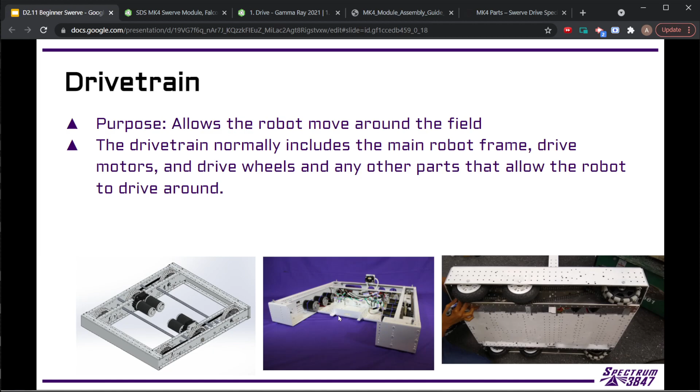These are what kind of the standard drivetrains look like, which we went over a couple weeks ago when we talked about different subsystems. But we did briefly touch on that Swerve exists in that presentation, and it's definitely one of the most advanced drivetrains. It takes more motors, so you need 8 motors because we're independently steering each wheel and driving it. So this allows for a lot more control of the robot. It allows the robot to do maneuvers that a normal tank drive or skid steer robot can't do.

So it allows for the full moving forward, reverse, left, right, spinning all at the same time, which has some big advantages in some of the games where we're able to easily realign, readjust, and change our motion of the robot as we're going a lot easier. But it does take some specific design things where you have the corners of the robot all taken up, and again more complexity with the different motors and things. So trying to figure out how this actually works and how we get to the steering is a lot of what we're going to look at today. But first we're going to look at the history.

So going all the way back to the 2000 games, this is even before I was in FRC. We have this robot here that was built by Team 47, whose name was Chief Delphi. That's where the forum we use gets its name. They had independently driven front wheels, so they could steer these front wheels and power them. But the back wheels were unpowered and just castered, because back then we had a lot of motor limits. You didn't have a lot of motors to be able to do anything. But this allowed them to get the motion they needed for the game. This is one of the first instances of this concept of independently steered wheels coming into FRC.

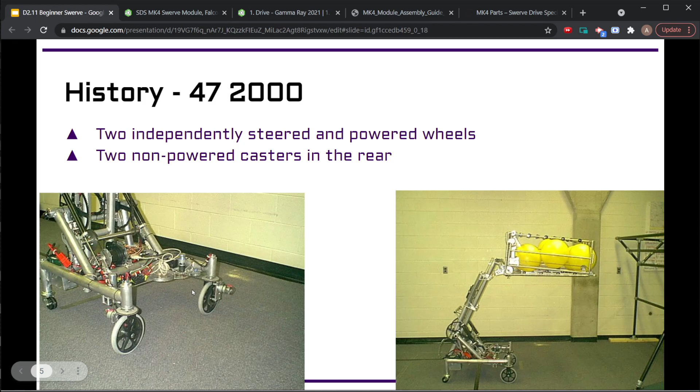From there, several more teams started playing with it and doing different things. The next one we're going to talk about was one of the first robots that I saw that I was just in awe of. So this was 2003, my freshman year of high school, and this robot was made by Team 111 WildStang. And they won the world championship that year.

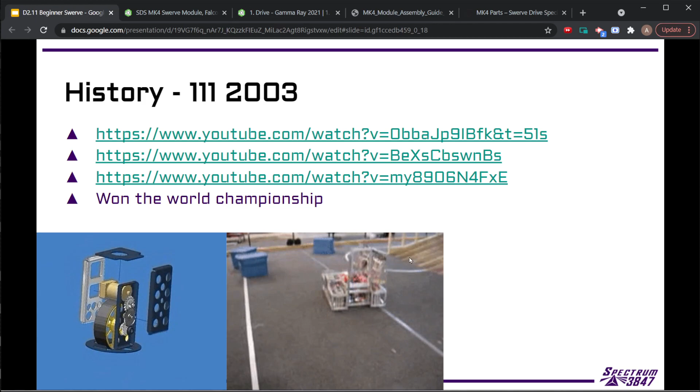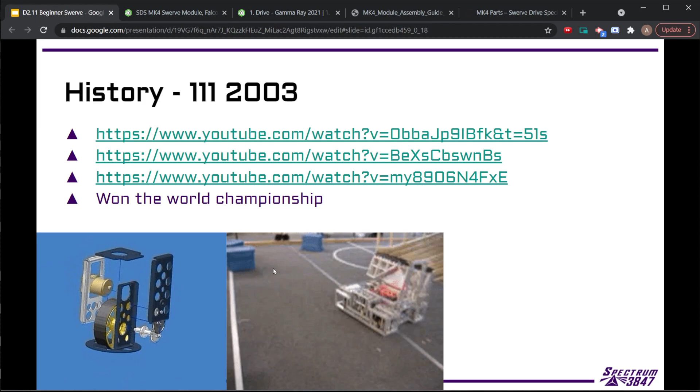The game is rather simple. There were these stacks of totes on this big ramp, and what the game ended up being was just a giant game of King of the Hill. There was a large platform that you had to be on at the end of the match, and you got some points. And depending on where the bins were, you got other points. And if you stacked them, you got even more points. But it was so easy to knock over stacks that the stacking game ended up not being that big of a component for a lot of matches.

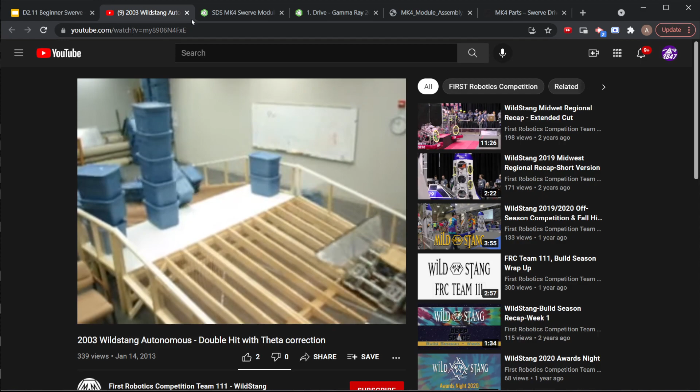So briefly, we can see what this... oh, so this is not. So yeah, this is the demo. So you can see they had really advanced software. This is all autonomous, so it's doing this and able to slide sideways and drive in different configurations. Let's see. So this is the actual match here, if I can pull it up. All right.

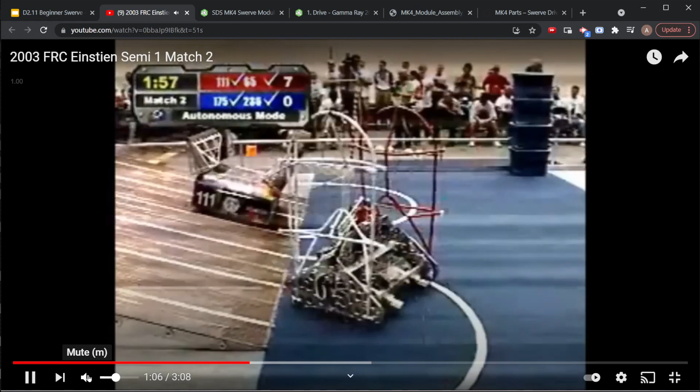So yeah, that WildStang, that's all autonomous. So this was pre-programmed. This is actually the first year autonomous ever existed. So this WildStang robot's even more incredible. What they did in autonomous this season was beyond almost what most teams are doing now in autonomous. They had a ton of pre-programmed paths and things that they could do. It was just a lot. The filming back in 2003 was not the greatest.

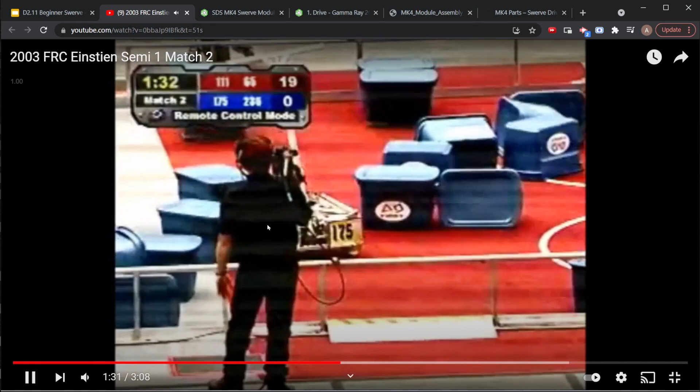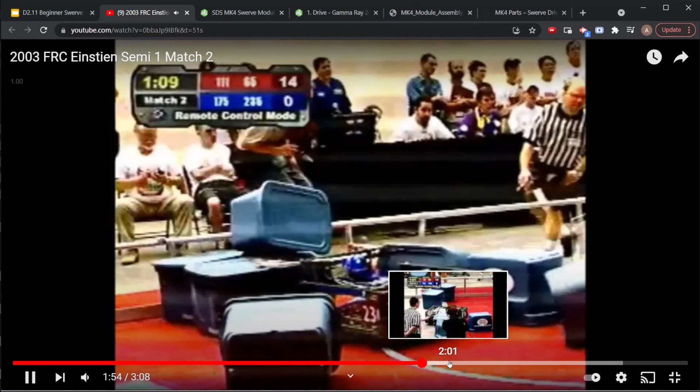So you can already see them. So they're just moving all of these bins down onto the field, and then towards the end of the match, they're going to... Let me get up there. So yeah,

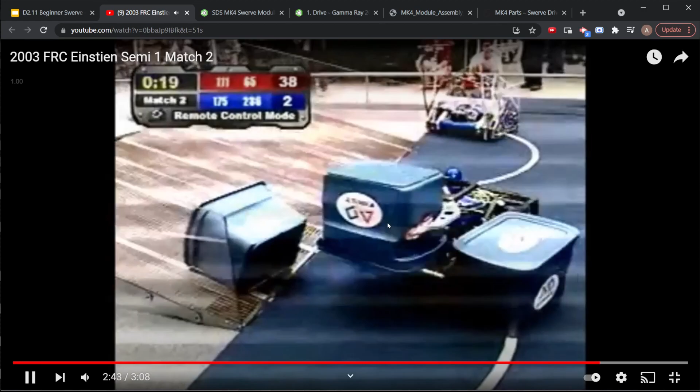so the wheels, you control them all through the control system, which we'll get into more when we do the control system part of Swerve. But you do have to make sure that the controls and everything on all of the wheels are acting correctly, so you do drive in the correct direction. You're not trying to scrape one of the wheels across the floor or anything, and it all works correctly.

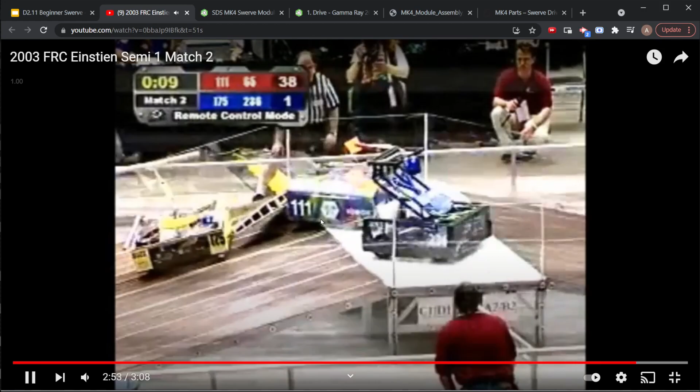So this is the big battle that's basically King of the Hill at the end of these matches. They were allowed to basically have these big wedges back then. You didn't have bumpers, and they're just kind of shoving robots out of the way, and they're figuring out how to stay up there. So this was the Einstein Field. This was the finals, and they do go on to win the world championship. It was a very intense robot, but not a lot of robots were able to do that even after them.

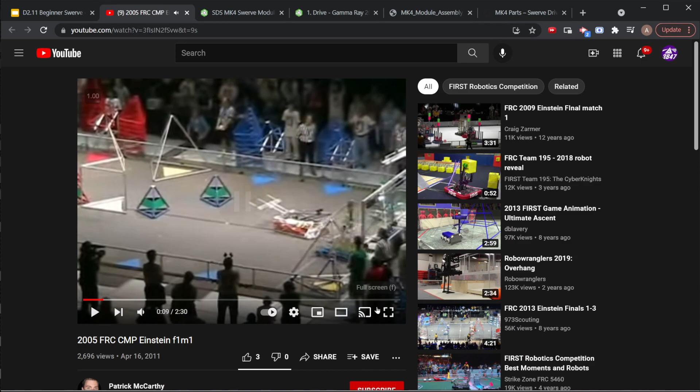A couple of years later, we have 2005. Team Hot built a three-wheeled swerve. So instead of a fourth wheel in the corner, they had three wheels. They took advantage of some other kind of weird rules at the time to allow the robot to do what's called flop. So at the beginning of the match, it actually starts vertical, and then it drives and falls down. This is something you can't do anymore. We have bumpers and things in place that don't allow us to do these things.

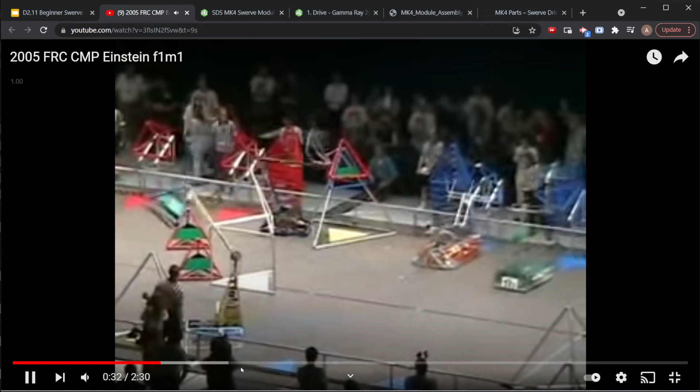So the flop bot allowed them to change the dimensions. They had this much bigger base, so they were much more stable. Because instead of being limited to the normal footprint and the height, they were limited to the entire height as the length of their robot. So they were able to do some of the different controls to slide sideways, but they didn't do it that much. A lot of it was just steering. But it was an independently steered robot as well, and they did win the world championship with that design.

So as we move into modern Swerve, we're going to look at the Swerve drives that we'll actually be using in '22 in this next coming season. Assuming the game incentivizes us to have Swerve. You can always do it, but assuming it makes sense, there's not a game with a bunch of obstacles we have to drive over, where it's going to be a relatively flat floor, and there's going to be an advantage to doing Swerve. So the Swerve module that we'd be using is most likely going to be the SDS Mark IV. SDS is Swerve Drive Specialties.

It's a company run by a mentor from Team 2910. The original design was run on their robots. And then he decided to spin that design into a company and start manufacturing the parts in his garage. He has all of the CNC equipment to make all these parts at his home, and then he makes them and ships them off to teams. This is the fourth version that just came out this summer. It just started shipping in August. We actually haven't even built one of these yet. We own 4 of the kits. We haven't actually assembled them yet.

So there's some different options to configure different speeds and things you can do on there. And there's a full assembly video too that walks through the full assembly of the entire module all the way through. So there's a lot of good instructions, so it's relatively easy to build these. And you don't really have to know how all the parts work.

So that's one of the reasons why we're doing this presentation, is so we can talk about what all the parts do. And we're going to be using this one as an example, but ideally most of the parts are going to be similar across all of the swerve drives. There's going to be some unique things. This definitely has a couple very unique things that other ones don't, but largely the principles are going to be the same.

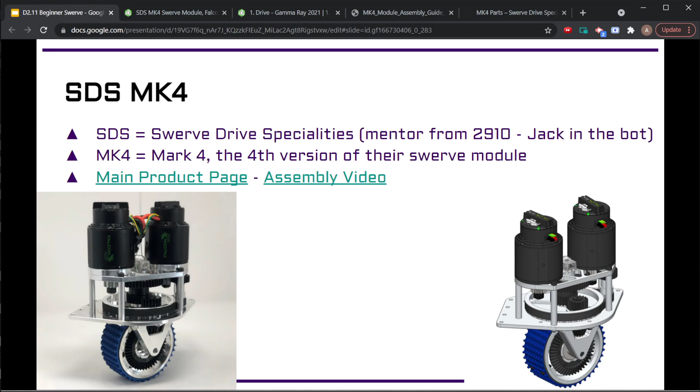So this is kind of the list we're going to look at of the different parts that go into making the swerve drive actually function. So the first thing that we've already talked about is that the swerve needs 2 motors. So on almost every swerve, the 2 motors are split. So one of the motors is your drive motor. So anytime that this motor is spinning, it's connected to the wheel and it's having the wheel spin. And we'll talk about exactly how it gets connected as we go through.

And the second motor is just there to do the steering. So it's connected to the steering, and it's what actually spins or rotates the wheel itself around this center axis. So it's how we can direct the wheel into all the different directions.

So when we want the robot to slide sideways or spin while driving, it's the combination of these two motors that determine where each individual wheel is pushing. Is it pushing to the left, to the right, whatever? So depending on whether this is going forward or backwards, or if this is steering at the same time, we get different motion from the robot.

Some things to know is that for some swerve modules, you can make this motor less powerful, since the steering motor isn't the one that's actually moving your robot. It just has to steer the wheel. There are some designs that use a smaller or lighter or less powerful motor here. The SDS modules end up just using the same Falcon 500.

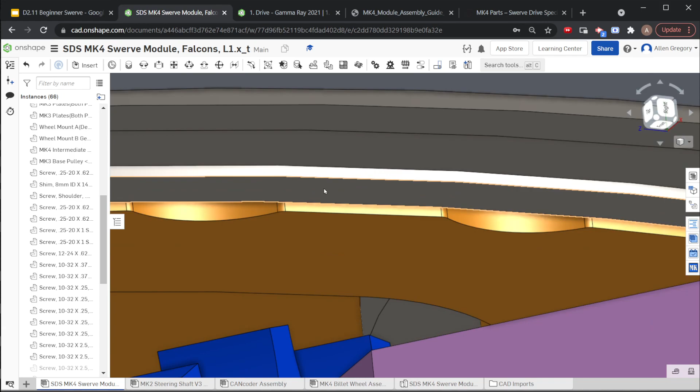And so this bearing, just like any of the bearings that we talked about before, has this inner race. So this is the part that's spinning with the module itself, and it has this outer race, and this is the part that is staying stationary. And you can see these bolts are basically clamping it in here. So this is how it gets mounted.

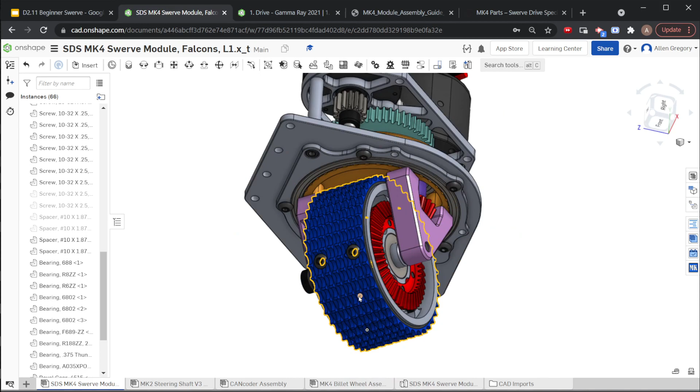And so the entire weight of the robot, right, since we have these four wheels, these are the only things touching the ground. We don't have anything else touching the ground. The entire weight of the robot is being pushed up through this bearing and almost trying to push this inner race away from this, right? So if you had a bearing that was too weak, you could imagine this whole thing could break, and then this plate would try to go to the ground.

This thing would try to go up, and it wouldn't work very well. Or the whole thing could, if you had a bearing that wasn't designed right, bind. If you had too much force going through it and too much friction, when you tried to spin it, it wouldn't be able to spin. So those bearings and their design are really important.

So we actually use a specific type of bearing called an X contact bearing. The photo over here on the right can show you the difference between a normal bearing, like this one at the top, which is just a radial bearing. This empty cavity would have a steel ball bearing in it, just a steel sphere. And on the radial bearing, you just have load being pushed from the two sides.

If we had this on a normal drivetrain, it would be turned the other way because we'd have a shaft spinning horizontally through it, and we'd have the force going up and down supporting the robot, and everything works fine. We try not to ever push up and down on this type of bearing, whereas with this X contact bearing, because we have these flats milled into the races, they support it a lot more going up and down, don't let the bearing break, and still let it roll even when it has that other force pushing up and down on it.

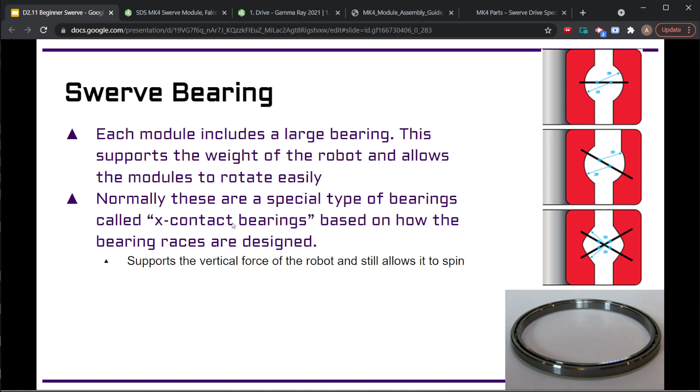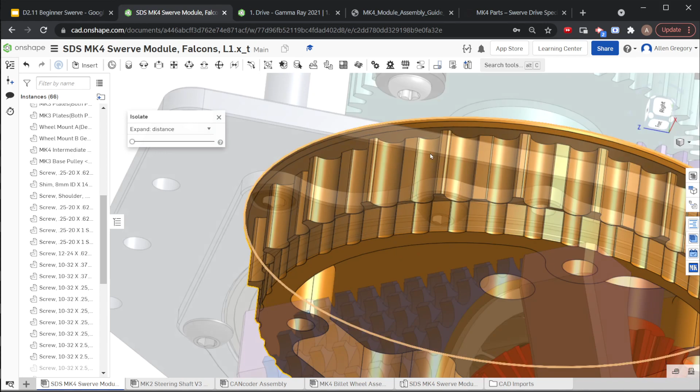The portion of the robot that actually does the steering on this module is the main pulley. So this is the orange thing right here. This is a big timing belt pulley that has a lot of features built into it, so it's actually a really cool part. If I bring this up in CAD, we can see what it looks like. There's a bunch of very specific holes milled into it. All of this material is pocketed. This whole thing starts as just a big block of aluminum, and it goes through multiple operations on a CNC mill where they're removing all that aluminum to get to the shape we want.

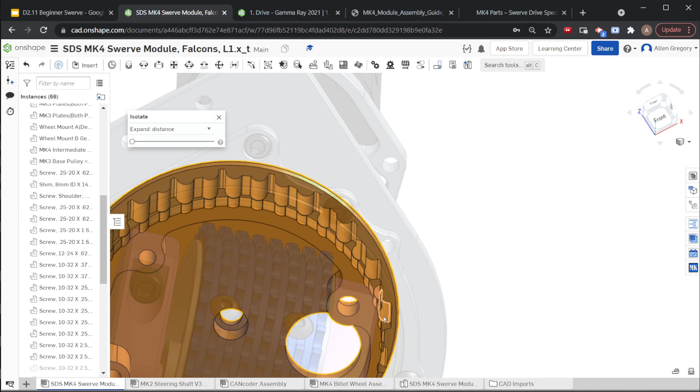Some of these are really unique shapes. You have this tooth profile where it's missing a tooth, so you only have a tooth every other tooth around this pulley. That still works because the pulley's big enough that the belt's not going to skip teeth, even though it's missing them. But this allows him to actually do the machining. If he didn't have the missing tooth, the tool he uses wouldn't be able to cut the teeth properly.

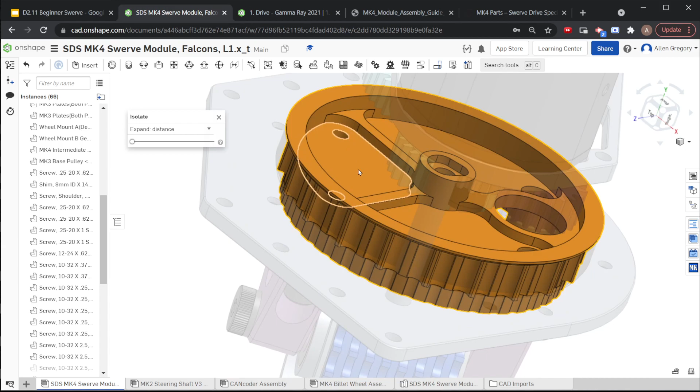And then the rest of the mounting holes, we'll talk about what they're all for, but it basically allows all the power transmission to happen, to get the drive motor to send power down to the wheel. And it gives us actual mounting places for the rest of the module. All of that is built into this really cool part. Where's one? There's one here. It's another $40 part. We can see what it actually looks like in real life.

Parts like this are reasons why we don't make our own swerve. For us to make this part would be very difficult with the equipment we have. So it's easier to just buy the COTS assembly because this has been tested. We know it works. It's easy to get spares. We don't have to make spares if we break one. We can just order another one. So it's very convenient.

Okay. The steering shaft is how we actually go about turning that big swerve module. So this shaft is another pretty complicated part. You can imagine if we tried to make this, that would not be easy either. There are steering shafts on this website too, I believe. Let's see. Yeah, so the steering shaft is here. Oh, it doesn't have a real picture of it.

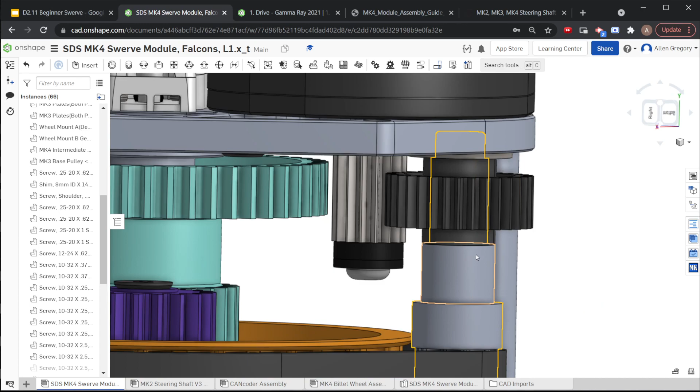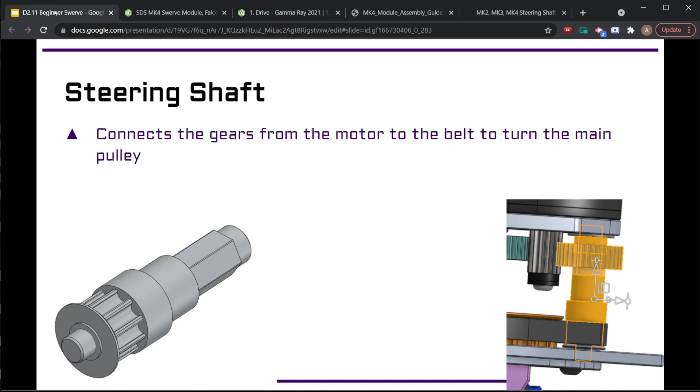That's not as helpful. So the steering shaft is what takes the power from the steering motor. So we have the gear that's on the end of the steering motor, which, if you remember from last week, is called a pinion when we have a gear on the end of the motor. And it has to be really close to this other gear, but it doesn't actually touch, right? So it's not driving any power to this gear. It's just driving power to the gear right here. This gear is mounted on this shaft, so that's what that little bit of the hex portion of this shaft is for. So you have this gear on there, and then it's built in. It has this pulley down here.

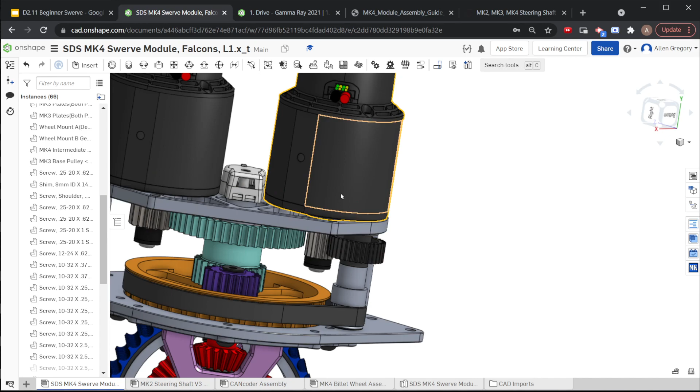So then when this motor turns, it spins the entire module, and it's geared down enough that it has enough force to be able to spin that module easily and not be too hard on the motor or take too much energy for the motor to actually be able to spin the module around, since it is having to kind of drag portions of this wheel around against the carpet. But it has more than enough power to do that. Another reason why we have the Falcon motors doing our steering is we have a lot of power, and it lets it turn without any issues. So that's another unique part that's much easier to have produced for us than for us to make.

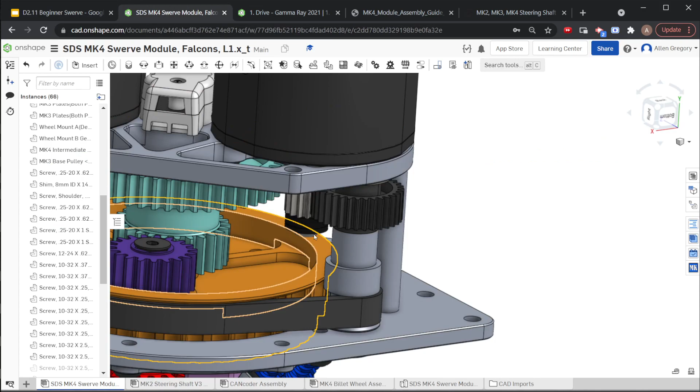And then the really unique part of this specific module, and we'll look at a couple of the other modules very briefly at the end, you'll see that they definitely look a little different, is we have this center gear and column in this specific module. So this center gear is actually one part in the MK3 and 4. So these are similar to the ones that we used before. So if I isolate, we can see. This is a single piece of steel that has the two gears fully attached to it. So these can't spin unless this one's spinning too. So it doesn't have to be mounted to a center shaft or anything. And then they have the bores in here for specific bearings.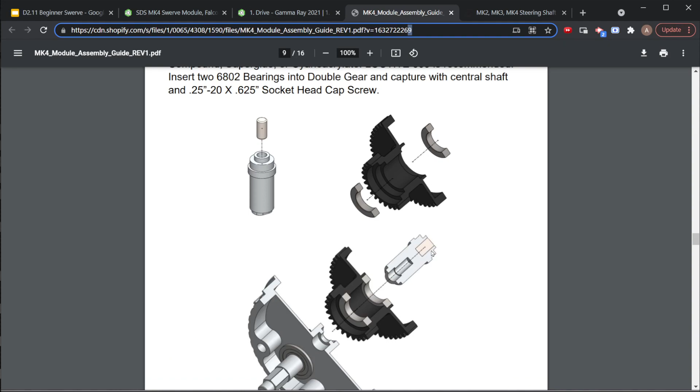We can kind of see how that looks in the assembly guide right here. This is a cutaway view, so this is like looking at it halfway through, and we have these bearings that get pushed into the center gear, and then we have this center column that gets slid all the way through, and that center column is what the actual center gears here are going to spin on. So that center column is going to rotate with the pulley, so it's rotating with how fast the wheel is pivoting, and then this gear here is actually rotating way faster because it's spinning with the drive motor. So it's spinning really, really fast, so that it can spin at the rate that the wheel's going to actually turn to make our robot go.

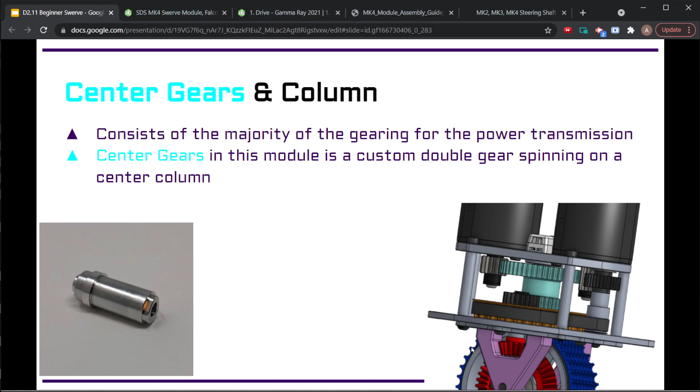So this is this kind of setup here where we have a single shaft and then we have bearings and another kind of shaft around it. It's called coaxial because they share an axis of rotation, but they're not going to share the same speed. So this shaft on the inside is going to be spinning a lot slower than these gears are on the outside. And that's a really important part of this module. If you didn't have that, we wouldn't be able to control this swerve nearly as well, because this shaft up here, when we get to it, is how we get the encoder value, so we actually know where the wheel's pointing. So if we didn't have this shaft sticking up through the middle, we wouldn't know where the wheel's pointing in the software, and we wouldn't be able to control the module nearly as well.

These center gears are things that you can customize. So you can customize the speed from these gears to change your output speed. So if we wanted to make the robot have a higher top speed or have more pushing power, you could change these gears one way or the other to trade speed for pushing power, and that helps make a decision on how you want the robot to be able to drive and handle and those types of things. This again is another pretty complicated part that we would not want to make ourselves in our shop.

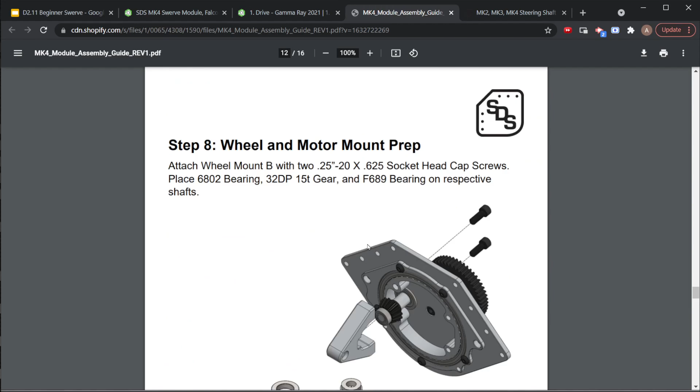The next stage of the gearing: the first stage of gearing is from the drive motor's pinion to this top part of the double gear, and then we get rotation down to the lower part of the double gear, and it drives this gear that's attached to the intermediate shaft. So the intermediate shaft is located here, you can see it in a couple different spots. It has this gear here, and then the lower portion is down here.

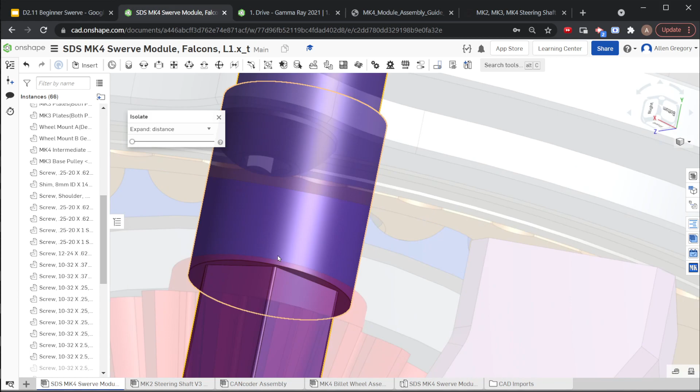And we can see it in the CAD as well. So here's the intermediate shaft. It has a little bit of a hex up top, and then it has a hex on the bottom, and has this middle portion that allows it to spin through some bearings here, and then it spins through bearings at the bottom as well, right on that round portion.

And so this is what actually transfers the drive motor power from above the wheel, on the stationary part of the wheel. So this motor doesn't move at all, right? This motor is always just driving this gear, and it's never going to move in relation to the rest of the robot. But this main orange pulley is, so it's going to be spinning around. And while it spins, this gear is able to spin around this central column and still stay attached to this lower gear.

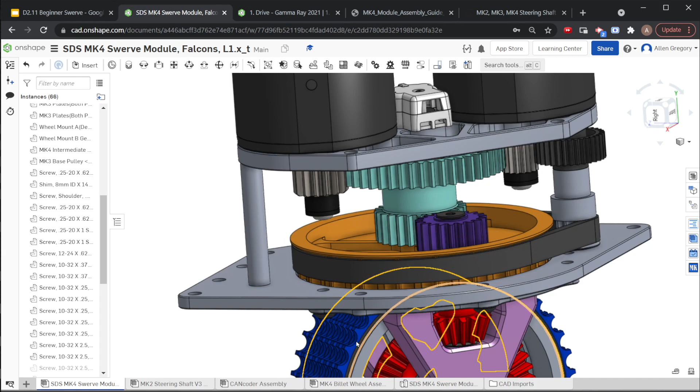And that's what lets us keep power driving to this wheel while it's rotating around, which is definitely a little weird to realize that it's able to work that way. I definitely recommend at some point coming to the lab and asking for one of the Swerve modules. You can get it in your hand and see exactly how the gears are all interacting, because it is tricky to see virtually.

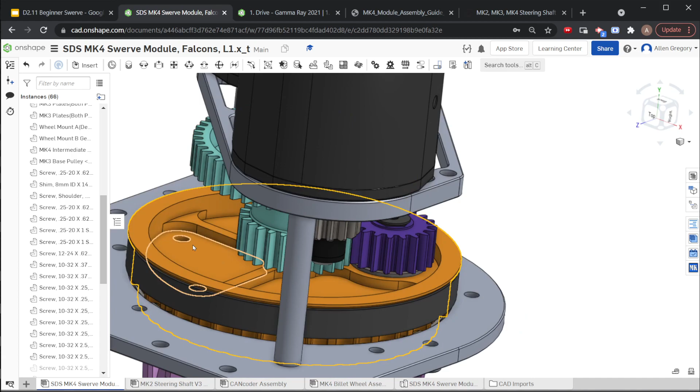But you can see that this gear would be able to spin around and at some point be over on this side while still accepting power from the drive motor and still sending that power down into these red gears, which we're going to talk about next. So that's the intermediate shaft, and then that's the second stage of gearing. So we go from pinion to the large gear, and then we have another set of gearing. This is actually going the other way, so this is actually speeding up, but because of all the sizes and everything had to work out, speeding up here makes sense.

So this gear is actually spinning a little bit faster in terms of revolutions per minute than this whole center gear stage is. And then, I did this slightly out of order, I feel like. Bevel gear makes more sense. We're going to do bevel gear, then we'll do forks.

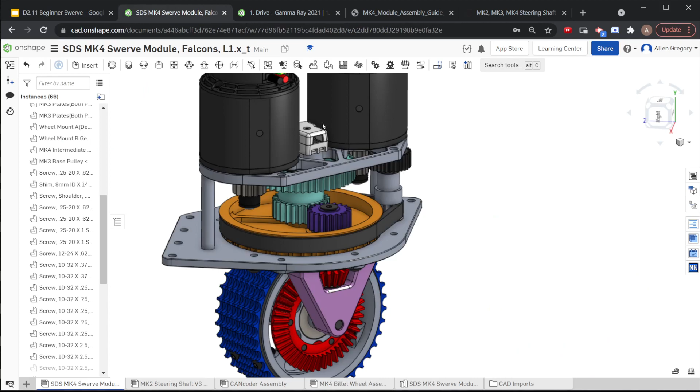So the bevel gear is the last part of our gear transmission. We have these unique gears that we may not have seen before; I don't think we've gone over them in any of our trainings yet. These are bevel gears, and they are specifically designed to let you transfer power and change its axis. Since this is rotating across a vertical axis, up and down, we then have these two bevel gears that move the axis 90 degrees. So now we get the rotation we actually want, which is on an axis parallel to the floor, so the wheel can actually spin.

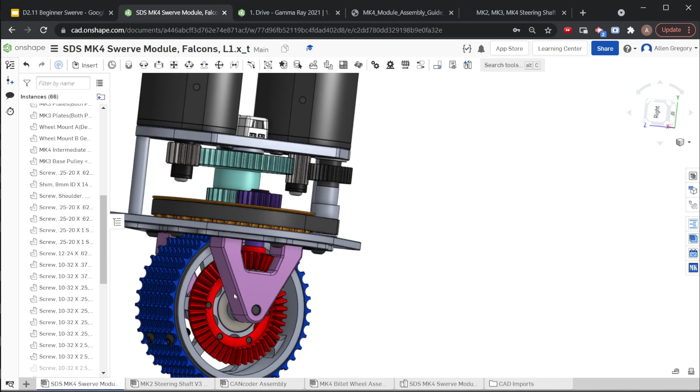So that's how we're able to have this vertical motor that has its axis spinning vertically, and then we can transfer it with bevel gears to a horizontal axis that lets our wheel actually drive our robot around. We don't do this too often in other parts of the robot. There are times where we may need to. We were looking at using it last year on one of our color wheel mechanisms, the control panel, but we ended up not actually implementing it.

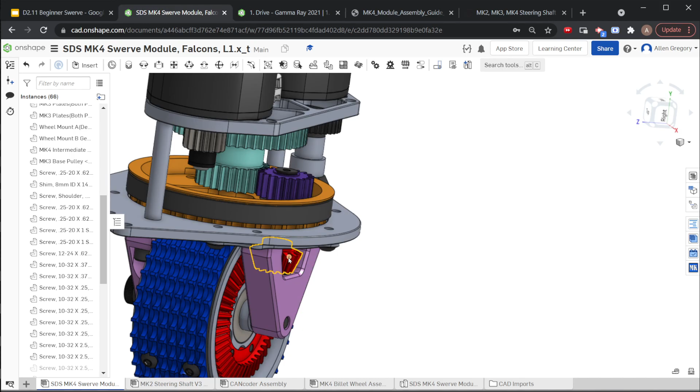But there are some times where you want to do this. This is actually the same way that some of our tools work; we have 90-degree adapters or a 90-degree close quarter drill. Those most of the time use a bevel gear or another type of gear that's similar.

That lets us change that axis. So it's a really cool part, and definitely a unique part that is a specialty part, and that kind of changes a lot of the modules depending on which bevel gears you can use and how you can package them all inside of here.

In this case, with the Swerve module, the Mark IV, one of the big changes that happened between the Mark III and the Mark IV was this bevel gear actually got a little bit smaller so that it could fit inside of this wheel, so that we could get a wider wheel, and we'll talk about that in just a second.

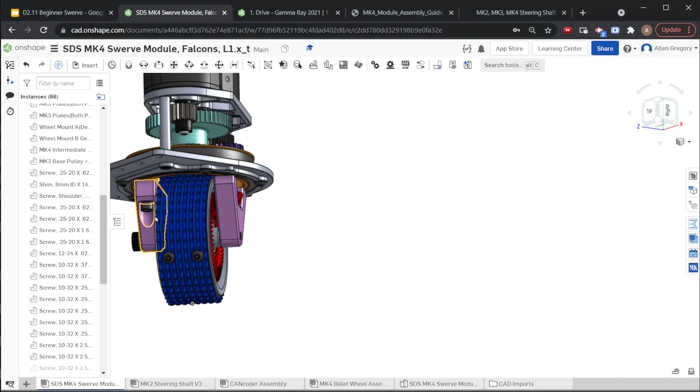So going back up, we have the actual forks, and these are another really important part of the Swerve module because these have to be very strong. Because you can imagine if these were thinner or weaker, if the robot got pushed while this was turning sideways, these forks might bend, and you wouldn't want your wheel to end up being at an angle somehow or to break off. So these forks have to take a lot of force, especially if this robot has to drive over any sort of bumps. The forks are taking a lot of that impact.

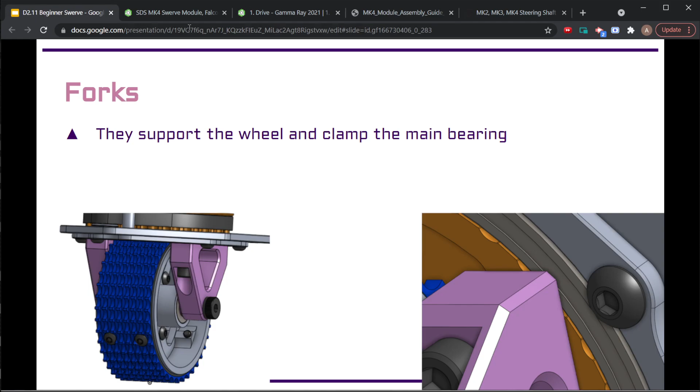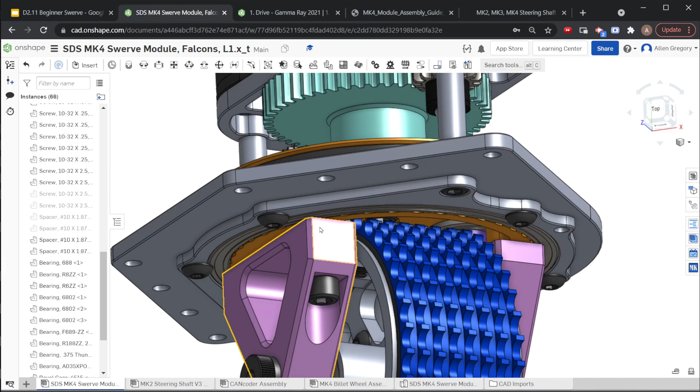And so they're here in this light pinkish, light purple color. And they are actually clamping this bearing. So this is how the whole module doesn't come apart. If we didn't have these forks attached here, this whole bearing wouldn't actually work very well if you didn't have this actually doing the clamping and grabbing this inner race. So all of the parts that are spinning are able to secure it in place so this can't move around, and you can't pull the whole module straight up or anything, because it gets stopped by this little bit of contact right here on the inner race of the bearing.

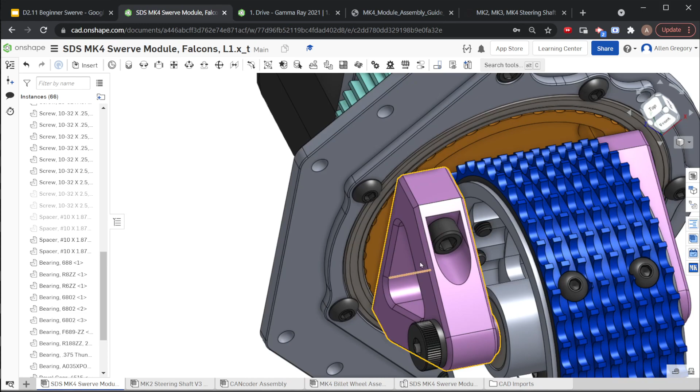This module is a little bit weird in that the two forks are very different. So we have the fork that doesn't have the bevel gear in it. It bolts in from the bottom, so it screws up and mounts into here. So there's threads in this pulley, and this bolts in from the bottom, whereas this fork that has the bevel gear on this side bolts in from the top. So it can be a little tricky.

We definitely had some issues with this at Texas Cup on the Swerve we were using. We didn't have Loctite in some places, so we were getting some loose bolts. And so making sure we could actually get to these bolts and access them is definitely a little bit more complicated because these are on top compared to just being able to do it from the underside of the robot.

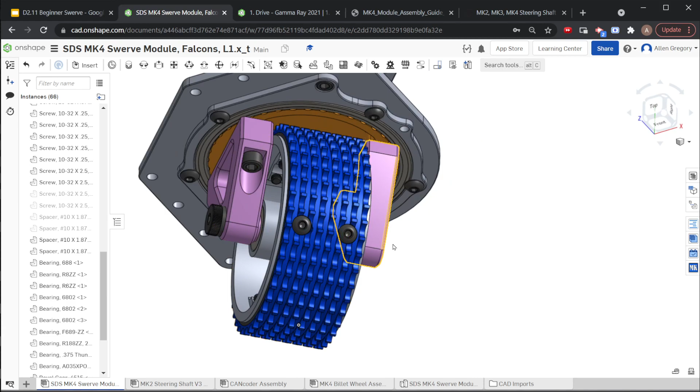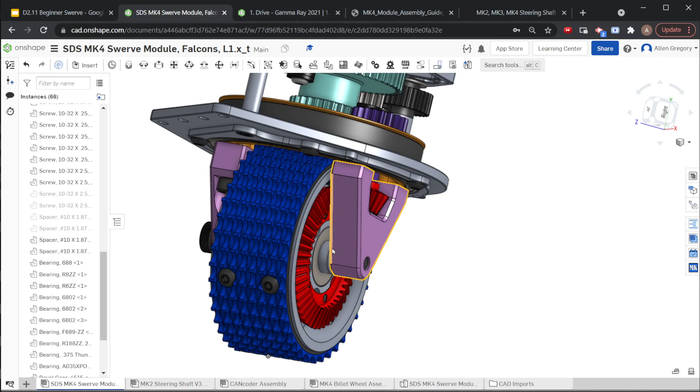The forks have to be held together through the shaft that goes through the wheel, so the shaft that the wheel is actually spinning on. In the case of the SDS Swerve modules, they have what's known as a dead axle assembly. So the axle itself doesn't rotate. We use dead axles a lot. You'll see them when we start getting into how we design intakes and a bunch of other mechanisms. We really like to use dead axles. They allow for the axle to be a lot more of the structure, and can take a lot more of the load and more forces without bending. So we use them a lot.

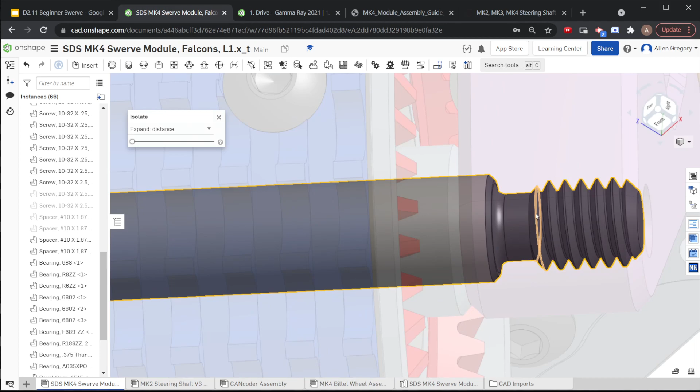In this case, they use what's called a shoulder bolt. So this style of bolt, where you have the bolt at the end, and then this nice smooth shaft running through the rest of it. And right here, it has what's called a shoulder. So it gets bigger here, and this allows us to screw it and tighten it right against a component. So this is going to tighten right into a flat part so that we can get this whole assembly completely tight and secure. If we just used a regular bolt, it might just tighten into the thread, but it wouldn't actually tighten to this flat part of the bolt itself.

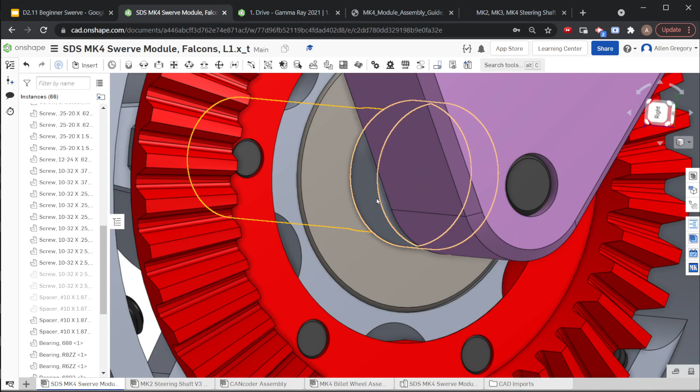These are very, very strong. Shoulder bolts are made of really strong steel. A shoulder bolt of this size, we're definitely not going to bend. And so it goes all the way through the wheel module. And then in the wheel itself, we have more bearings, just normal radial bearings since it's just a wheel. And these are what are actually spinning, and that shoulder bolt is staying completely still while the wheel's rotating around it. So a live axle would be if the actual shaft itself were rotating at the same speed as the wheel. And normally you'd have bearings mounted inside the forks in a configuration like that.

Okay, I think we already talked a little bit about the wheels, but we can talk quickly about some of them. So this is one of the upgrades on the Mark IVs: we get a wider wheel. So instead of a 1-inch wide wheel on the Mark IIIs, which we were using before, we added another 1/2 inch of tread. So we get a little bit more of this material actually touching the ground. And that helps for a few reasons.

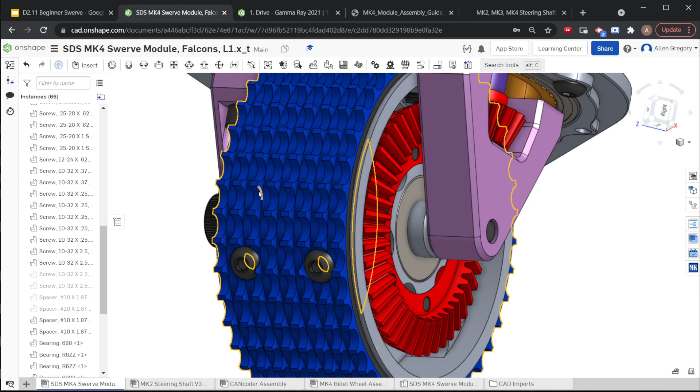The main reason that people have noticed is that with a wider tread, it takes longer for it to actually wear away. So that was one of the problems we had: we were driving really hard in matches and we were trying to push people and things, and we'd literally be ripping off some of this material. It's kind of a rubber that's attached to it. And you can kind of rip it off and almost shave it, and you end up getting parts of it that get really smooth and they don't work as well because they don't interlock and grip into the carpet as well as the new fresh tread does.

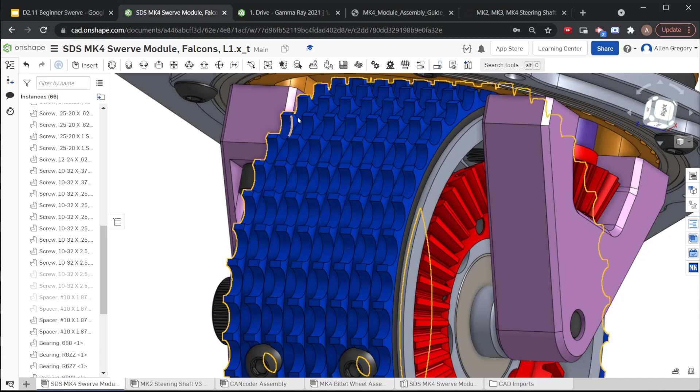So the idea is with wider tread, it should take longer to wear away. And you do get a little bit more contact with the ground since we have a wider wheel down here. You have more of this area touching the carpet, which should let us grip it a little bit more since we have more of these little teeth interlocking and grabbing onto the carpet. So the wider wheel should help quite a bit, and is one of the big advantages of going to the Mark IVs from the Mark III.

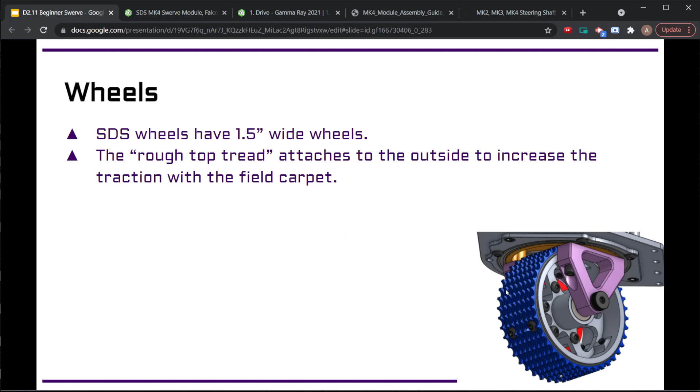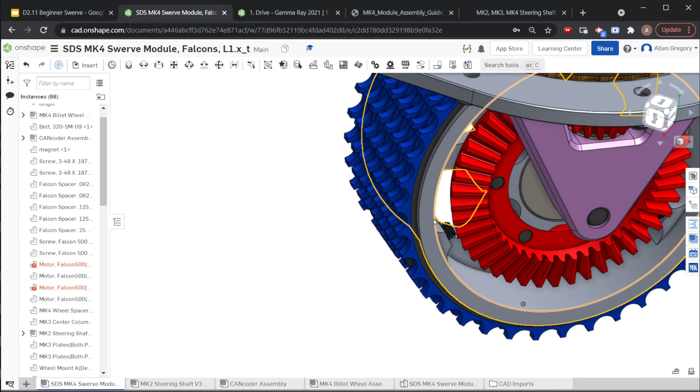Yeah, rough top tread is a pretty common way to do wheels in FRC. It grips the carpet really, really well. So the wheel itself is actually aluminum, and we have replaceable tread that we just wrap around the outside. So that's what these bolts are. These bolt the replaceable tread to this inner wheel, and allow us to get really nice grippy rubber, but still have a really strong aluminum wheel on the inside that we don't have to replace very often.

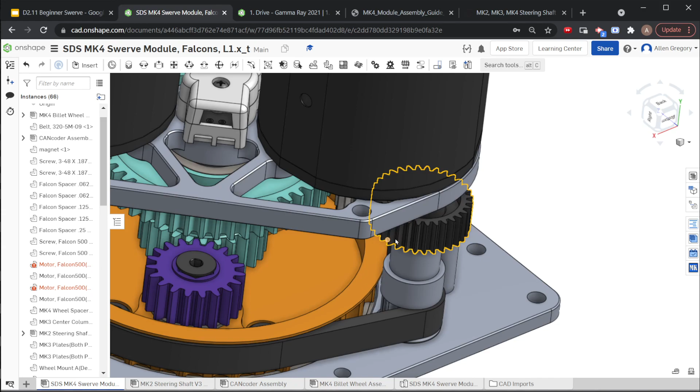Okay, so one of the more confusing things about Swerve is how do we actually know where the wheel is pointed? This gets complicated with some of the other modules and some modules before the Mark IIIs: you normally had something else attached somewhere along the steering, and you had to figure out exactly how it was geared, and you would end up having some error where you might think the wheel was pointed one way, but it might be a little bit off in a different direction, so it may not be perfect. Some of them are better than others, but with that center column that we talked about before,

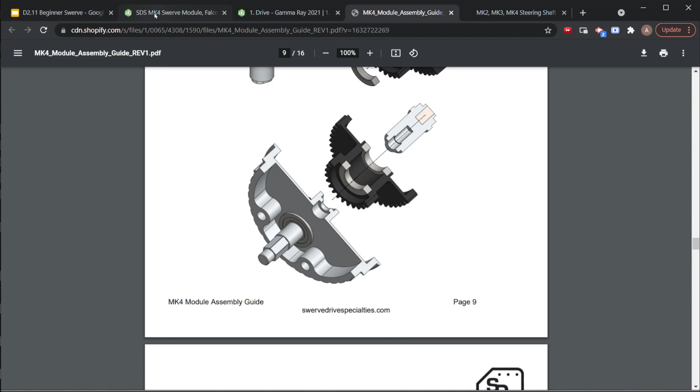this center shaft goes right through to the pulley, and we're able to measure directly down through the center rotation of the entire module, so we know exactly where this pulley is spun. That means we know exactly where this wheel is pointing. This sensor up here is called an absolute encoder. This specific one is a CTRE CANcoder. This lets us measure a magnet that's actually put into that shaft. Right up here, this little section that's a little discolored, is a magnet.

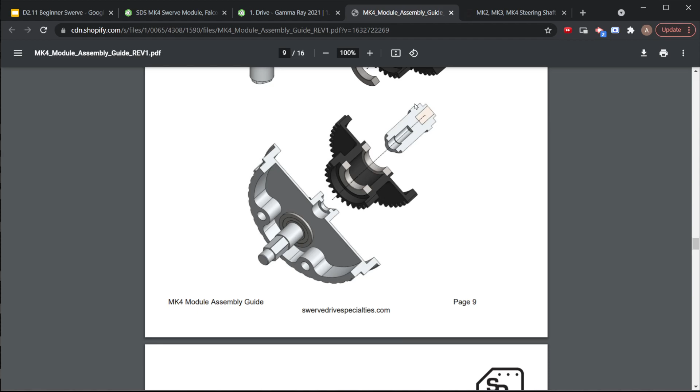Depending on how that magnet is spun in relation to this encoder, it can tell within a very, very fine window where that magnet is pointing. And from that, we know exactly where our wheel is pointing. So at the start of the match, we know our wheels are pointing in different directions. Let's tell all the motors to get them all pointing straight ahead where we want them, without having to manually set up where all the wheels are from the beginning, without some sort of homing routine. There are some modules where you'll actually have them touch a switch somewhere around the rotation.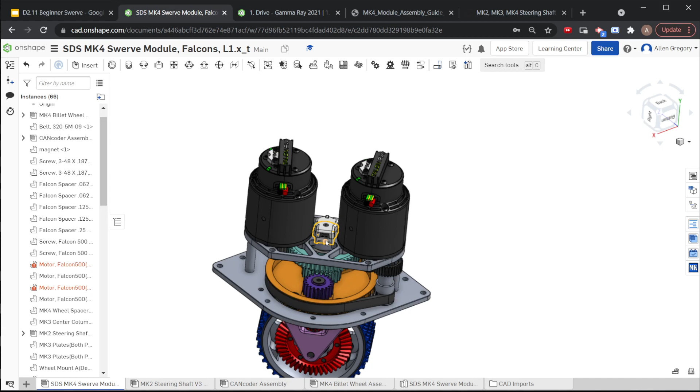There's a bunch of different things you can do to accomplish the same thing. The absolute encoder is one of the easiest. It allows us to just set in code where forward is for the robot, so all the wheels are pointing the same way. And then from there, it can turn them all to that exact same spot every time the robot boots up. And it makes our lives a lot easier.

And because it has that unique center column, this whole setup works very well compared to some of the others, because you end up with a lot fewer parts too. So instead of having another gear or belt assembly or anything, we just have that center shaft going right up and allowing us to sense the rotation of the module.

The Falcon motors themselves, which we'll talk about more when we do the control side on Falcons, do have encoders inside of them. So a lot of the motors that we use now, the Falcons, the Neos and the Neo 550s, which are three of the main motors that we use, all have encoders built in because they're brushless motors and they need them to operate correctly.

And so this gets us a lot more control over any of the mechanisms we use that have these brushless motors, because with that built-in encoder we can tell how fast the motor is spinning and how far the motor has spun without having to add any other hardware. So the only reason we need this external one is so we get that absolute rotation and we know where it's pointing even when the robot is off.

As soon as the robot turns on and we know where they started, we can use the encoder in the rotation motor to tell it to turn as many degrees as we want, and then we can use the encoder in the drive motor to tell it how fast to turn or how far to travel, which makes our autonomous a lot easier, and control in general, so the driver can have more direct and more consistent control with the robot.

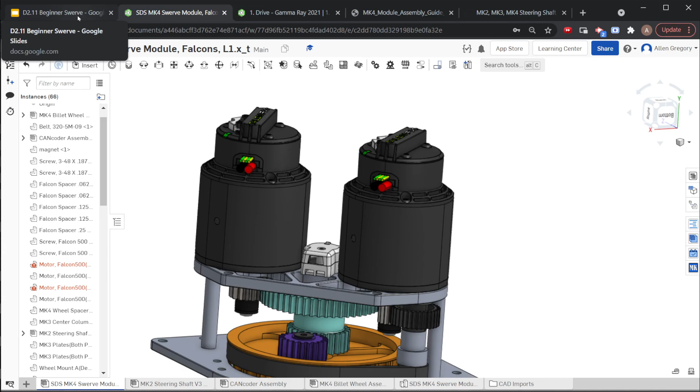Okay, so there are a few other COTS swerves that we'll probably never use, but they are useful to know exist. Other teams use them, so you'll see them around at events. One of the more popular ones is the West Coast Products Swerve, also known as the WCP Swerve. They look really similar, and you really have to look at some very fine details to see the difference. Let me see if I can make this.

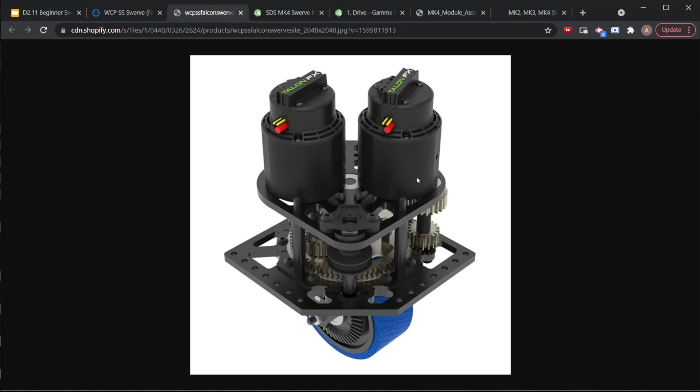So one of the biggest giveaways to whether it is a West Coast Products Swerve or an SDS Swerve is where that encoder is. This will have the same encoder housing right here, mounted to this little spot here, and you can see it's not over the center. The other big giveaway is that instead of having a belt and pulley like the SDS Swerve does, it has gears to do the rotation.

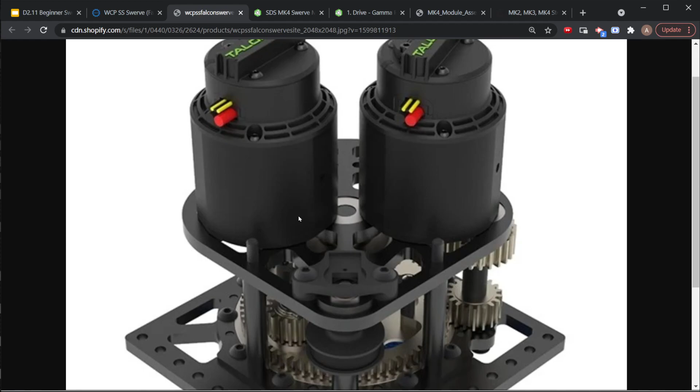So the SDS Swerve has this belt and pulley system to steer the module, and the West Coast Products Swerve has a smaller gear and a big gear here to do the steering. A lot of the other concepts are the same. You're still going to have a bevel gear. You're still going to have forks. You still have those two motors doing the same responsibility: this is the steering motor over here and the drive motor. So a lot of the same concepts as the one we just looked at, just implemented a little bit differently.

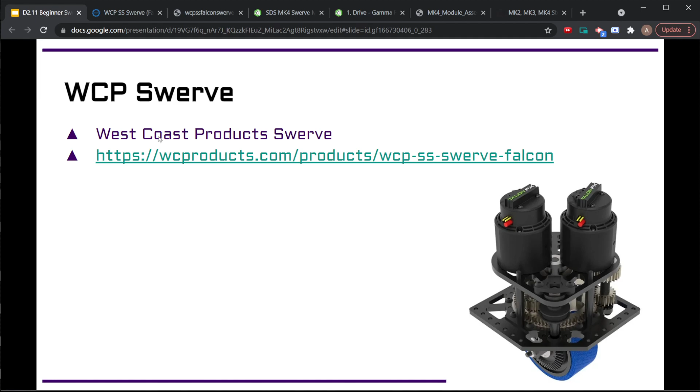The West Coast Swerve is what teams like 1323 and 148 use, and many others that I can't list off the top of my head. Another module has existed for quite a while; I think this one's actually been around before both SDS and West Coast Products Swerve were. It's called the AndyMark Swerve and Steer.

To my knowledge, fewer teams use this module, but it has definitely worked. I'm blanking on the team number right now, but a team has won a world title with it not too long ago, I believe in 2019. Brighton TechnoDogs.

And so there definitely are ways to make this work. It definitely looks a bit different than the modules we looked at before. The plates and stuff are mounted a little bit different in here. We're not going to go through exactly how all of this works, but you can see a couple of different things. So it does have a live axle, so it has those bearings in the forks, and so that shaft and wheel are going to spin together.

It also does the concept where it has a smaller steering motor, so it has the Falcon still here to actually do the driving of the wheel. Then it has a smaller motor to do the steering and to turn the wheel to the orientation we want. So yes, those are a couple more options that teams might use. We probably won't, but they exist.

And then one of the final things we want to talk about is how we actually mount the Swerve. So in 2021, the easiest way for us to mount was to just have a bolt, which we don't actually have in this CAD. I thought we did. But up through these holes, we would put a long bolt that would go up through the belly pan. So the belly pan is this entire piece of wood that covers the whole bottom of the robot.

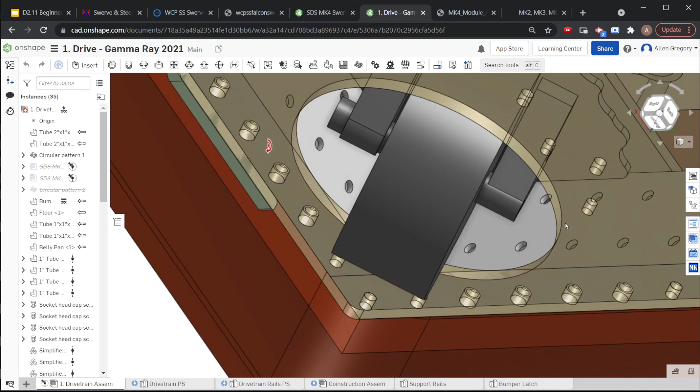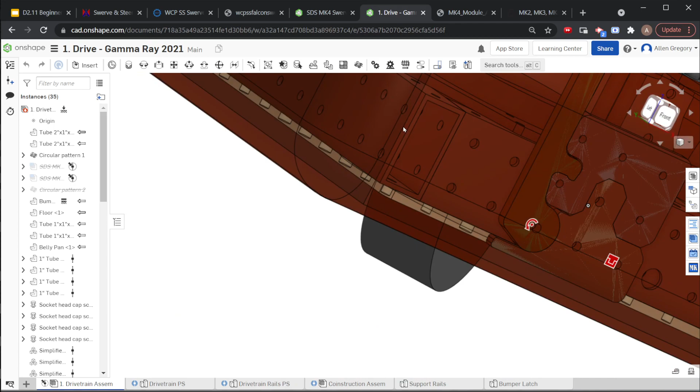And so we would have bolts that stick up through the wood, going all the way up through this 2x1 tube. And then the holes in the swerve module are already threaded, so they're acting like the nut. And then we make sure to put Loctite to secure them so these bolts don't try to come out. And we have nice long 2.5 inch or so bolts going all the way up through and basically clamping this top plate of each swerve module to the belly pan itself, and clamping it around these 2x1s. So that's how the whole frame is secured in all four corners with our belly pan and the 4 swerve modules.

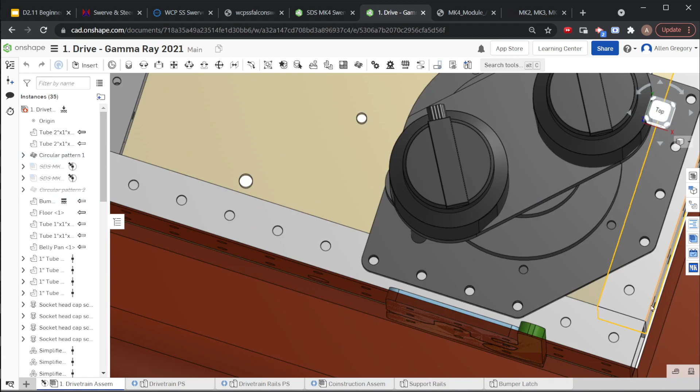And so this is largely the way we'll build our 2022 robot, most likely, is we'll have some lengths of 2x1, and we'll figure out what the dimensions are. So this robot was, what? So these were about 27 by, let's see, clicked the wrong thing. I want to say 24 or 25, somewhere in there. Yeah, 24. So we were 24 by 27, and so that's a pretty good size. Hopefully we can stay within there.

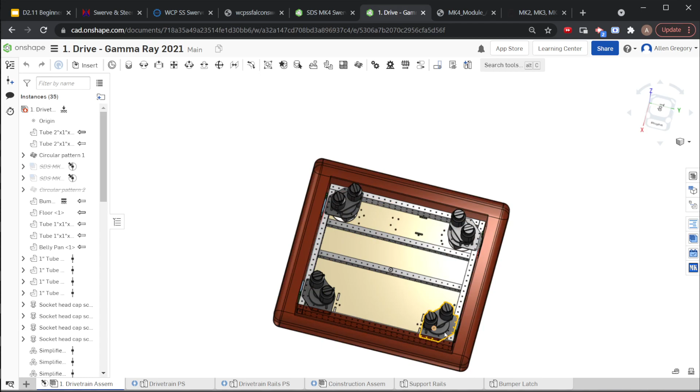So we liked building a smaller robot. It lets us get into smaller spaces. It's harder to actually run into us if we have less room. It's also a lot easier to be light if you're a smaller robot.

So that is how the modules actually work. You notice these swerve modules aren't fully detailed. These are generic swerve modules that make it easier for Onshape to load them quickly. So it saves some time. So we use those instead of this full module that has all the gears and everything, all the details of the module. We don't need it most of the time. It's easier just to have this generic module just filling up the space in our model for us.

Okay, that's about all we have. So the last thing, if people want to learn more, there's a lot more information. There's a full hour that Team 694 presented with Team 1640 at one of their virtual conferences on Swerve Drive 101. It goes through a lot more of the history, and a lot more of how you actually do the designs and some of the different designs that exist. A couple of things I didn't get into here before we started doing this.

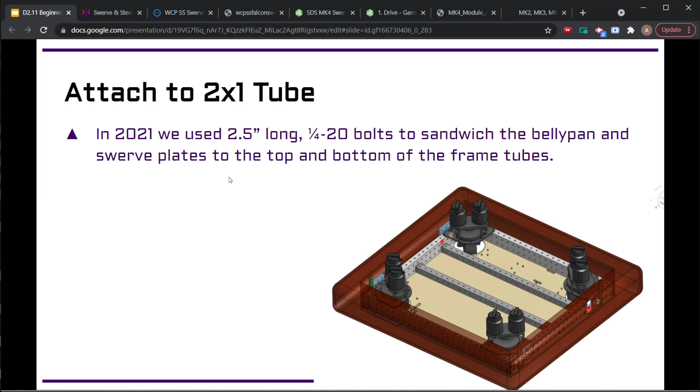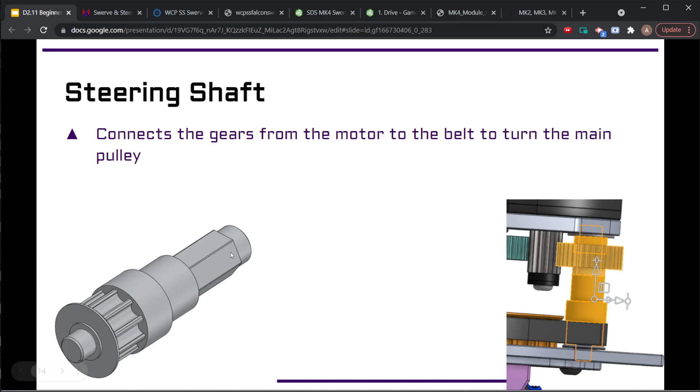There are teams who work on a predominantly 3D printed swerve, so there's a lot of teams who are working on how to print a lot of these same parts. So instead of making the really hard to make parts on a lathe or a mill and machining them out of metal, they're figuring out how to make some of these parts on a 3D printer. So you can still make really complicated geometries, really complicated things like this pulley, except you're doing it all printed. So it allows those resources to be used by a lot more teams.

So there's a big trend for a lot of different people in several teams. I know 359, the Hawaiian kids, just put together a version of a 3D printed swerve. Several other teams, 3005 was working on one. There's several teams who are working on 3D printed swerve that allows them to make the same thing, but just with less machining resources instead of going out and just purchasing it.